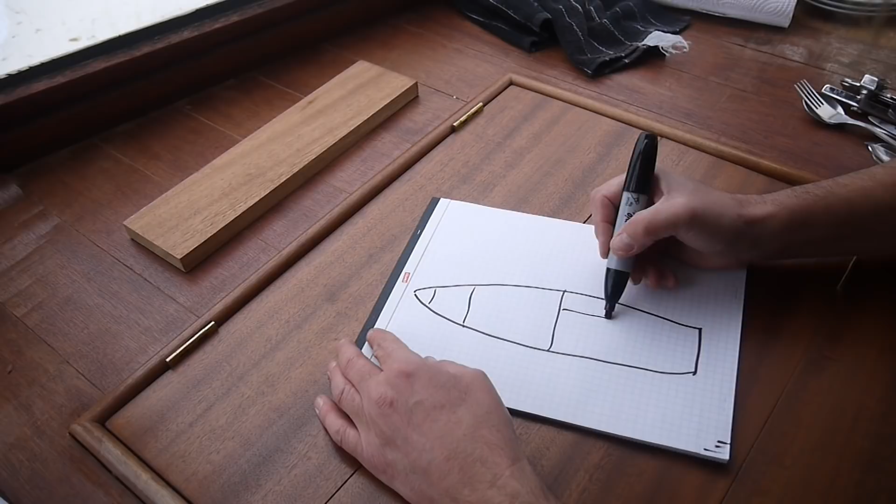Okay, let's have a quick review of what it is I'm trying to achieve here. I'm trying to make a drawing of the boat, a 3D model of the boat, but it's very hard to determine exactly the shape of the hull unless I can get control points all the way along that. So if you imagine the boat from the top looks sort of like this, right? That's kind of long and skinny. So we have the various bulkheads, the fore cabin, the wheelhouse, the bathroom is here, my bed is here, and then the aft bulkhead and the cockpit is here.

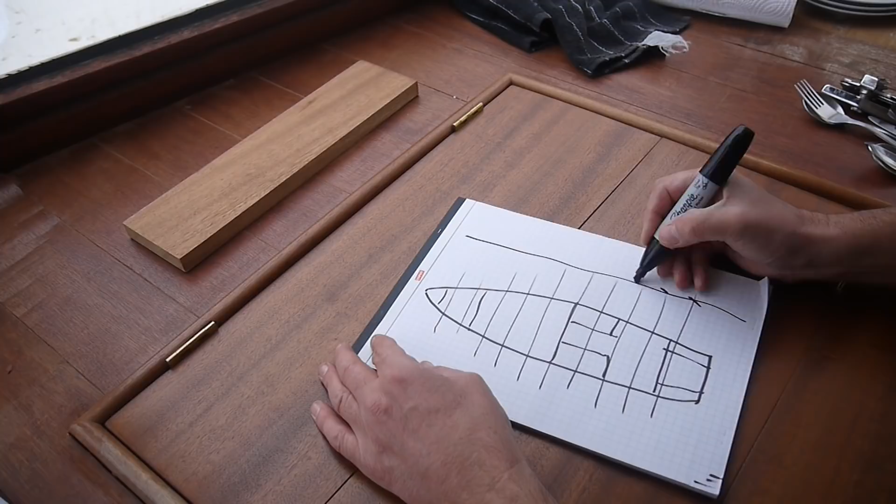Okay, so I basically need to take slices through the boat at all these locations, not necessarily where the bulkheads are, but at an even pattern. And those are called stations, and they're equally divided up from front to back along the gap space between the stations. Now we can get into what distance I'm going to do in a minute, but let's look at what a station looks like. Let's say at the very bow.

Well, at the very bow it's going to look pretty straightforward. There's the deck, and it's going to come down pretty much to a point and come back up again. That's what the very bow of the boat looks like, about 2 or 3 feet back from the bow. As we move back, the deck will be more like this, and the boat will be more like this, and then there's a keel obviously down, and it'll look more like that.

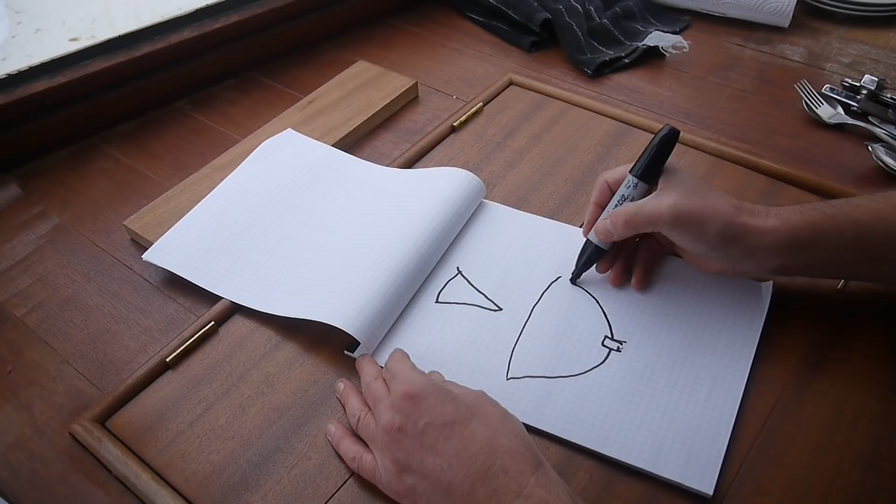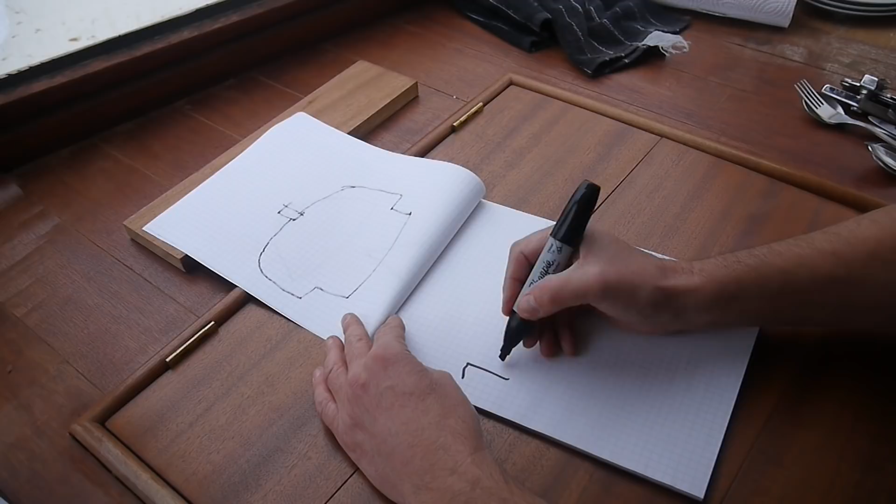As we move further aft, the shape of the boat will change because we'll be getting to a cabin. So there's the cabin top, the cabin sides, the decks, and then the shape of the boat will become more like this. There's the keel, and it gets more like that. Now there's an extra complication which I'll get to in a minute, but let's just move right to the back of the boat where we're at the cockpit. So the boat has side decks, and it has the cockpit sole, and the shape of the boat is almost flat, and the keel comes up like that.

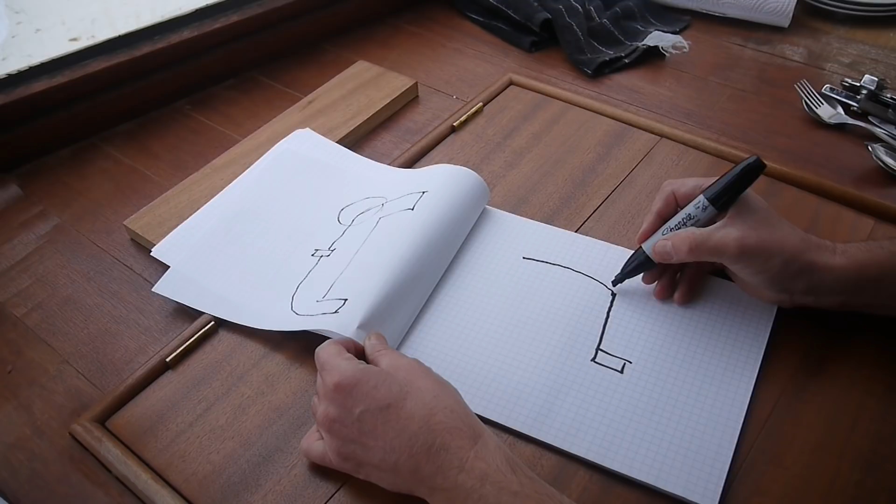Now this boat is a bit particular right at what they call the chine, and it actually has a hard chine. So these drawings aren't exactly accurate because at the back of the boat, if that's the keel, the bottom of the hull is almost straight on a slope and then turns very quickly and becomes the curve or the tumble home of the boat. So right here there's a very sharp bend, and that becomes less and less pronounced as we go forward. I won't get into that too much now because we're going to talk about that in detail later on, especially when we figure out how to strengthen the boat.

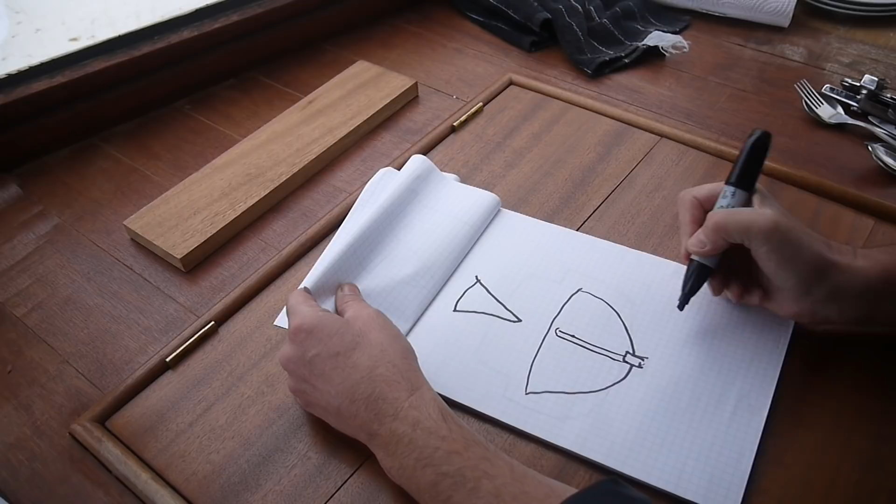But what I have to do is basically get all these cross sections of the boat and get some control points. In other words, here's my string or my center line, here's my vertical board that I can measure from, and I'll measure across to both sides at various heights, and down, and that will give me some control points, which then I have like this, and then I basically just draw a line between them and it creates the shape of the hull.

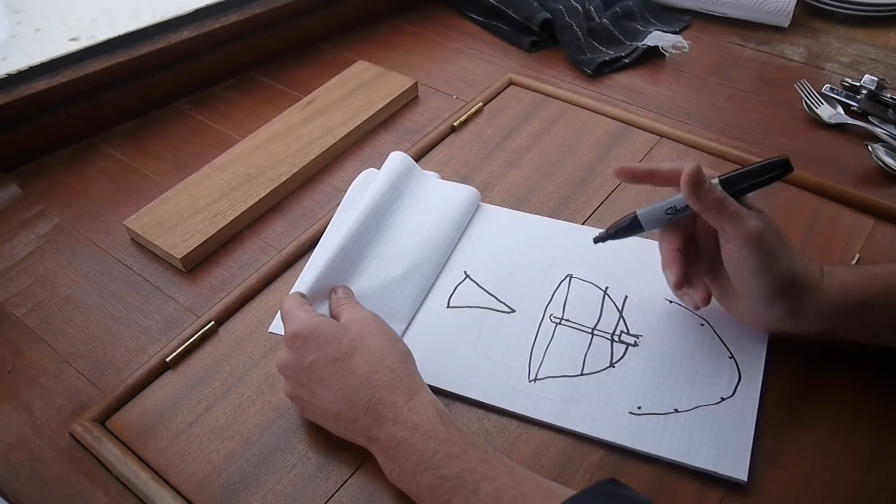Now I'm not going to be able to get a full set of control points at every station because there's too much stuff in the way. The best I'm going to do is be able to get on one side of the boat and most of the boat, and that's okay because the boat is symmetrical left and right, or it's supposed to be. But anyway, you can sort of see what I'm up to now. Let's get on with it.

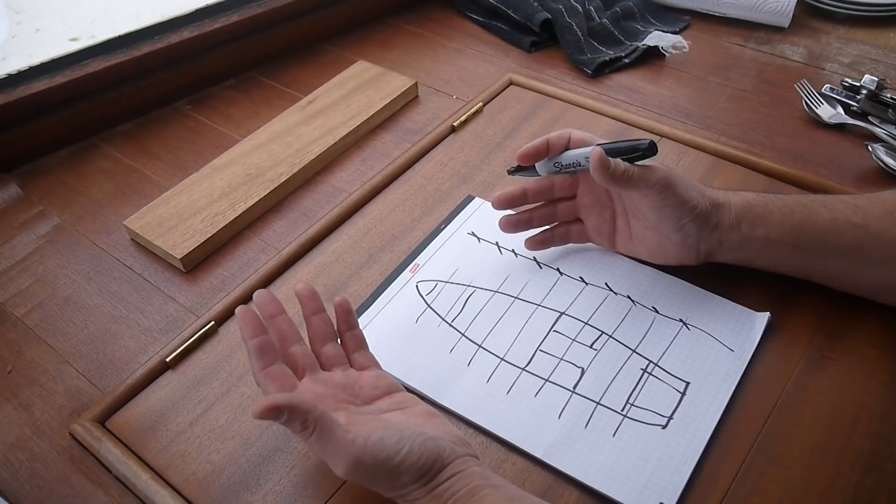Back to the stations. How far apart shall I put the stations? Well, the closer they are together, technically, the smaller the granularity, the higher the resolution, the better the job I'm going to do. But at a certain point, there's a diminishing return. It's just not going to get better measurements, and it's going to take me forever to do it.

So a kind of casual spacing might be 2 feet. 38 feet long, divided into 2 feet, be fine. Again, let's carry on. First, I have to mark off the string with the stations, which just means a piece of tape. Okay then, so one of the nice perks of my construction background is a 200-foot tape measure.

So I'm going to try and do this with only 2 hands, which means putting a piece of tape over. Okay, so easy peasy. 1 at 2 feet, 4 feet. All right, see ya. 6, 8, 10, 12. That wasn't much fun. All right, so labeling the stations from the bow aft, 38 feet long, every 2 feet. 10, 12, 14, 16, 18.

Okay, so I'm trying to be really clever here. Let's see how far this goes before it goes completely sideways. I've placed my story pole with the right edge of it just touching the string. And I put a screw in at the height of the string. Now I can bring my tape measure up and hook it on the screw. So it's easy for me to put datums down from here, and I'll do some of those now.

And the way I'm going to do that is take a string and stretch it across the boat from known things the same on both sides. So in the case of a stringer, it's easy: the bottom of the deck, the top of the deck, a window, etc. And I'm going to try and do that by clipping the string on to various things with little squeeze clamps. Let's see how we do.

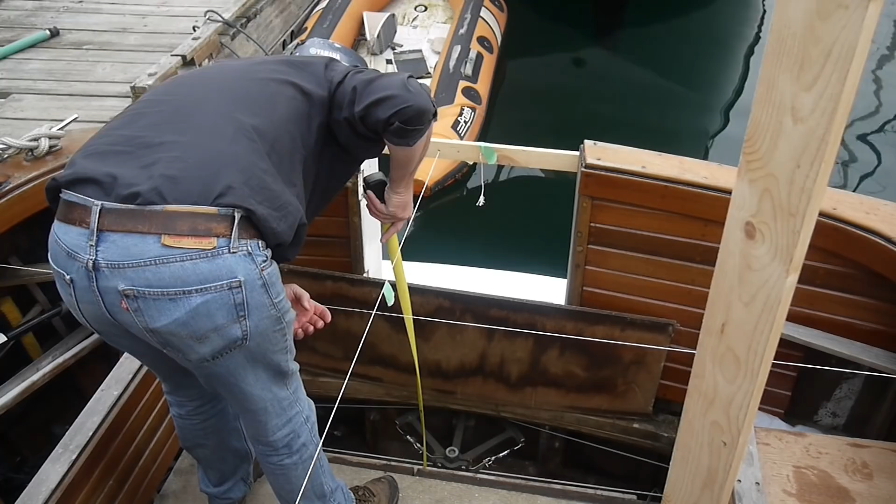Well, I've taken a ton of measurements in different directions. Not all of this will mean anything, but basically measuring along the line that I stretched from hull to hull, how far over, how far down to the various stringers, to the various sections of the thwarts and the cockpit sole. Now I'm going to lift up the aft section of the sole and take some measurements down to the bottom of the hull. 4 feet and 1/8. And now down to the actual bottom of the planking, 51.

Okay, that is enough control points for this station. As I move forward, I will probably move a little quicker and take less control points, but this one I was able to have a pretty good view, so to speak, of the entire inside of the hull. For instance, at this next station, I have very little information because I can't go through the sole, and, well, it's not too bad. Anyway, let's see how we do. This station that's right at the bulkhead, there's not much I can get to, but the very next one will have tons of information, so again, as I interpolate my way along, we'll do great.

Let's go inside. Oh, yeah. I can actually say that this is going remarkably well. So that is 26 3/4.

Okay, so it's been a few stations since we looked down into the bilge. You can see right there is the deadwood, the keel basically, and down below it would be the bottom of the hull. And this is the height of the floors, but I have that basically from the sole height. So let's say the top of the deadwood here is going to be roughly 54, and the bottom of the hull 56 3/4. It's working great, and that's what matters. Well, there's very little I can do at Station 22.

Okay, so I moved up into the wheelhouse, which in some ways is marvelous, and in some ways is absolutely miserable. Access to the inside of the hull there is a pain because there's a ton of wood under there, and of course access to the hull under the sole is a pain because this sole doesn't come up easily, and there is so much junk in the bilge. Okay. It's the strangest sole arrangement. Multi-layered, unusual, whatever. Okay, what we have here is a huge diesel tank, which of course is great. That is really in the way for seeing anything else. Oh yeah.

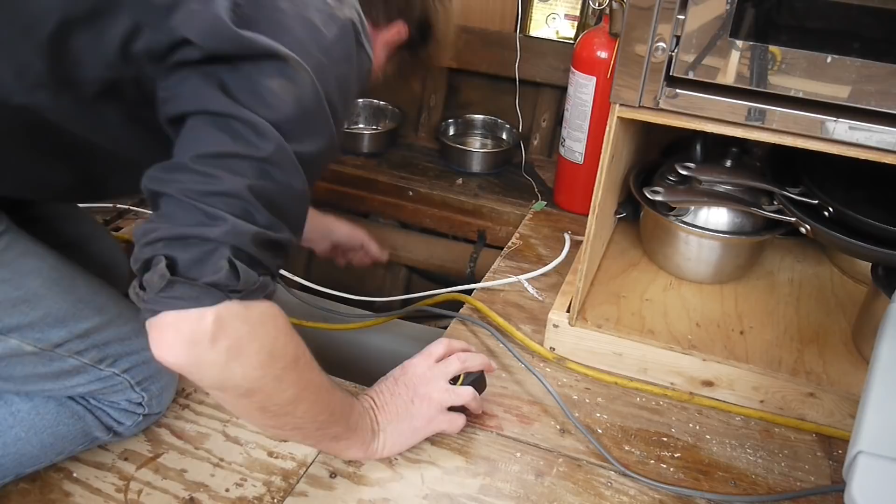This tape on the story pole thing, I use it for 1 or 2 measurements per station. It probably isn't all that valuable, but it was kind of fun. So 7 and 21 for 2 stringers. Again, down in the abyss, but I do have good access to the chine stringer. It's like I just have a peekaboo view to everything I really need, which is fantastic.

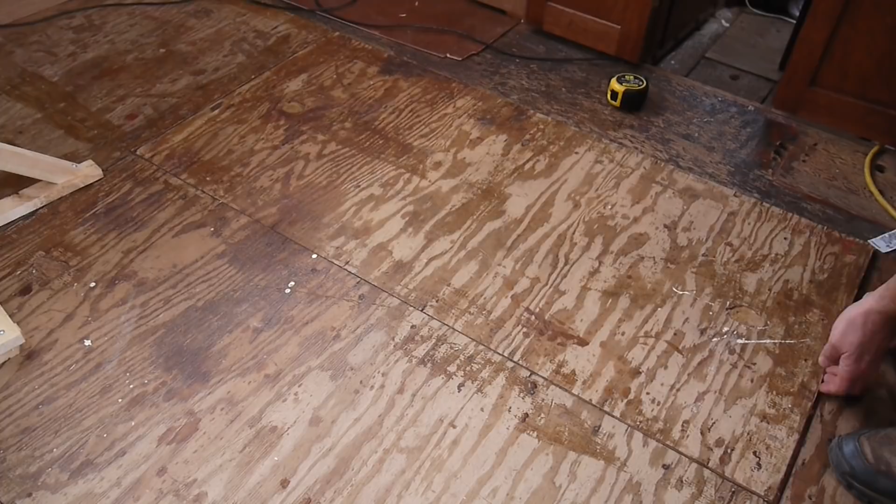Here's another joyous spot. Okay. Actually, there's an extraordinary amount of room here because the engine doesn't start till here. So there's this great big super highway of space here to hang out in and store junk in. Okay. All right. So 65 3/4. Well, this certainly isn't getting any less awkward as I move forward.

Too much stuff. Imagine working on a boat and nothing was aboard. Oh gosh. And in a shed.

That would be amazing. I have reasonably good access to the inside of the hull on the starboard side here because I've opened it up and haven't closed it up at all yet. So let's see what we can do. I'm not likely to bring you down here because in this small space, all you'll see is the tips of my fingers.

And here we have, it's kind of a shame to take it down. Progress. Fun, fun. Alright, so if you know anyone that needs one of these, I have it all ready to go.

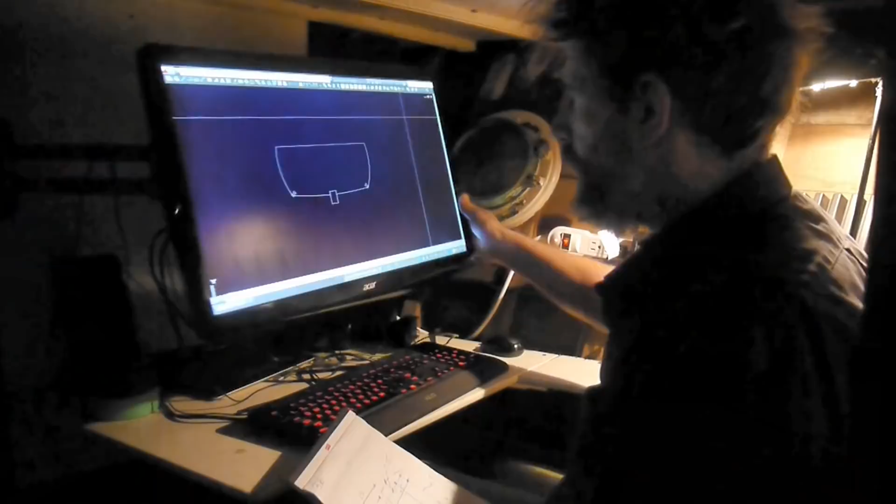Oh my gosh, okay, well I have a lot of data, a lot. Station after station, I'm not going to go through it all, but lots and lots. So now I got to put this all on the computer. Want to join me? Okay folks, I don't know how well this is going to show on the camera. I'll try a screen capture later.

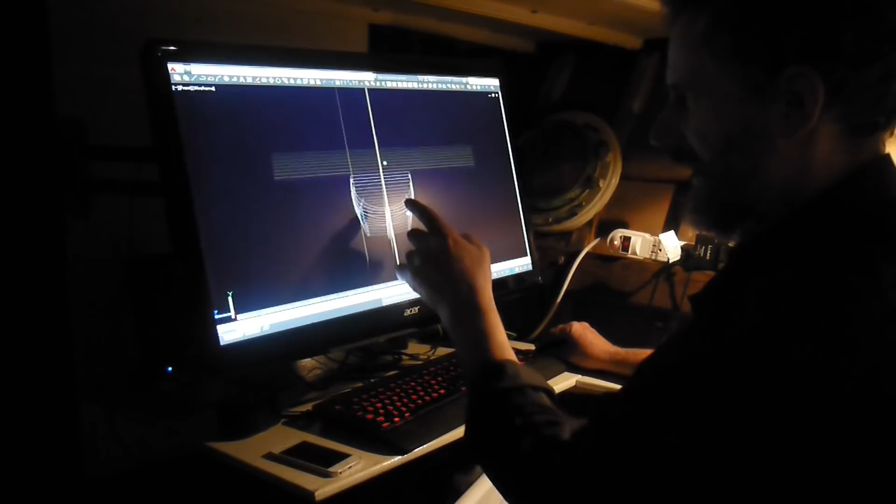So I'm starting to lay out all the stations on the computer in CAD. I use AutoCAD. So I've done the very aft station, station number 36. Done all the stations along to the broadest part of the boat. And now it's getting a little complicated because as I look from the back, I just see so much stuff. So I'm going to turn off these sections and work my way so every new section gets smaller. But it's generally going okay. There's some outliers, and that's definitely to be expected.

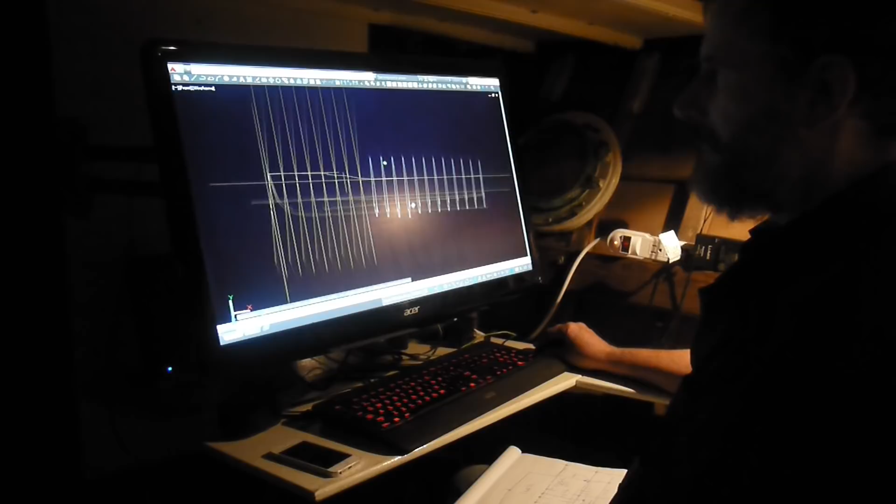So once I have all the stations in, I can connect them together, and in elevation, which is from the side, and in plan, which is from above, I'll be able to see where the real bad outliers are and stretch it all together again.

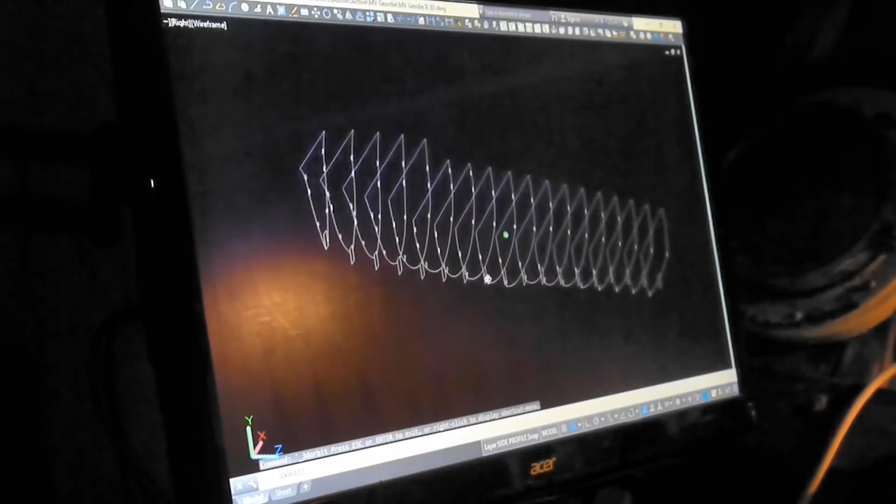Well, well, well, here we are. Okay, we have all the stations in, and this is just the raw data. If you look carefully in here, you can see an outlier. There's actually a few. There's one there, obviously. There's one up here. There's one here. So I know I've got some corrections to do, so before I just average out and smooth it, I'll go back to my sheets of stations and make sure that I didn't make an error there somewhere. That looks like it's exactly 4 inches, which means I may have measured from the wrong side of my story pole thing.

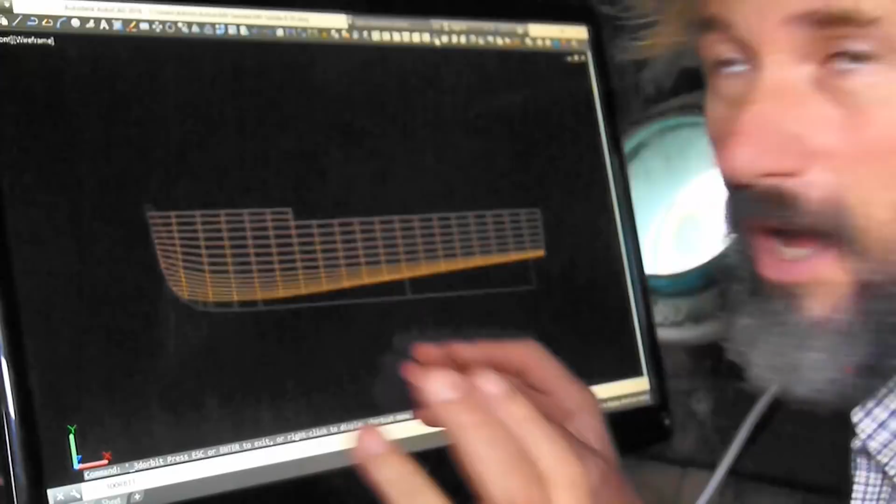Well folks, here we have it, and after a little tweaking, and I mean a lot of tweaking, I have something that I'm generally really pleased with. It could use a little more resolution, especially up at the bow. In other words, I'll have to put in more control points to get a nice curve there for a 3D model, but on the whole, this is starting to really look fairly accurate. Let's see what it looks like with some shading on.

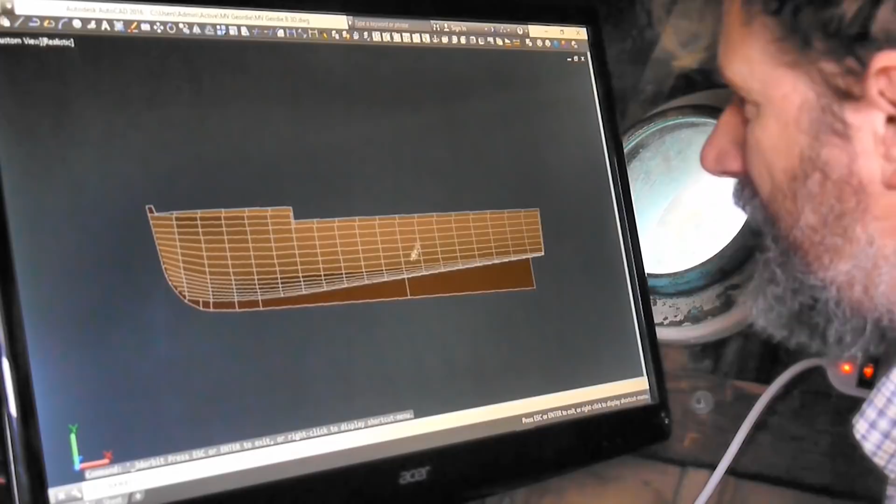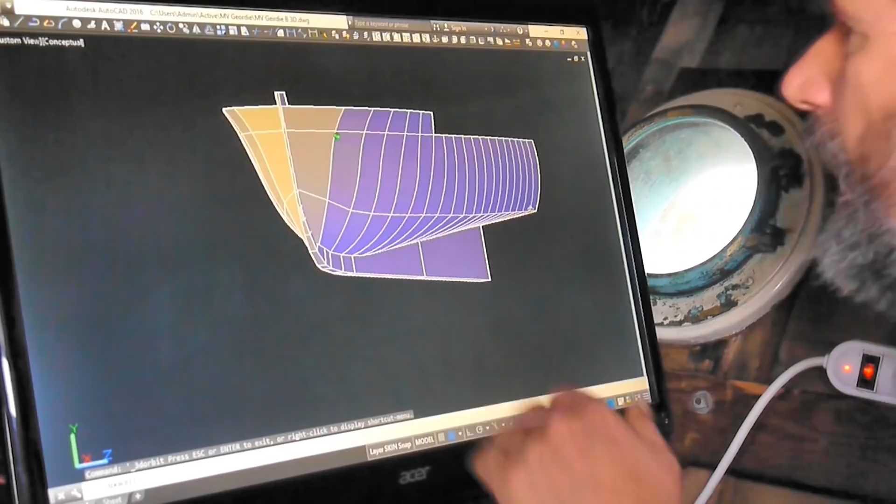Well, let me put the slightly different shading on here. You can see here the shape of the hull has this hard chine at the stern, at the transom, and that slowly softens up to be relatively smooth by the time you get to the bow. And that's considered the new hull design, the new Monk design. A lot less roll and a little bit more efficient in the water.

What's really nice about it is the really deep forefoot. The water line is about here. I think I could have added that. And so it pushes the water down, and then basically this long slope is constantly just gliding off the wave that you've created when you push the water down at the bow.

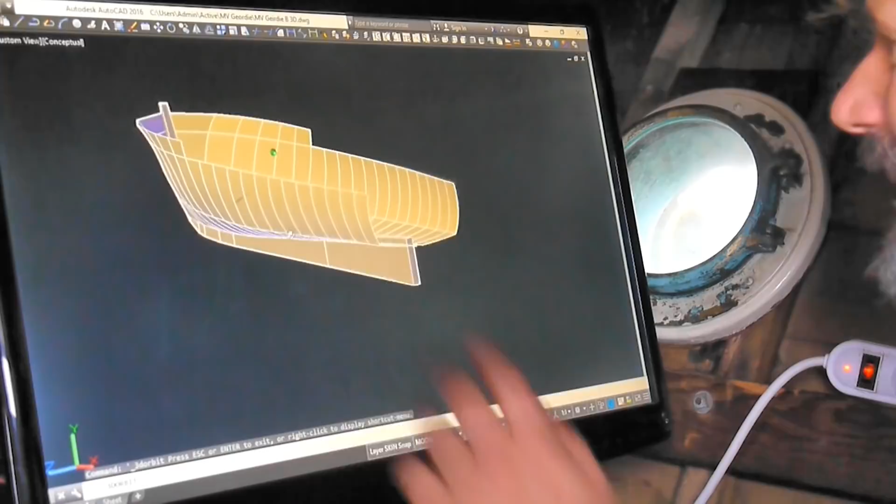I actually love the shape of this boat. Now, it creates some complications in terms of structure, but that's for another time. I think I've done as much as I'm going to do here now, and yeah, move on to building the rest of the inside of the boat.